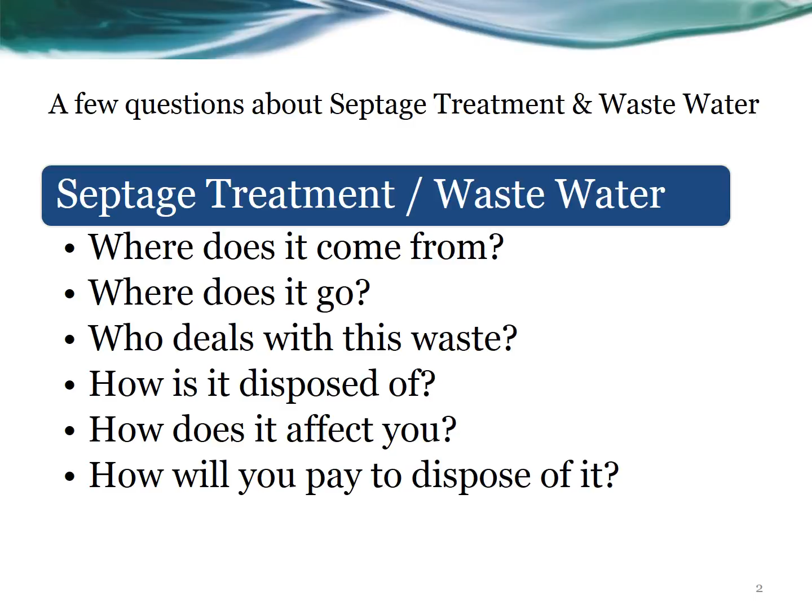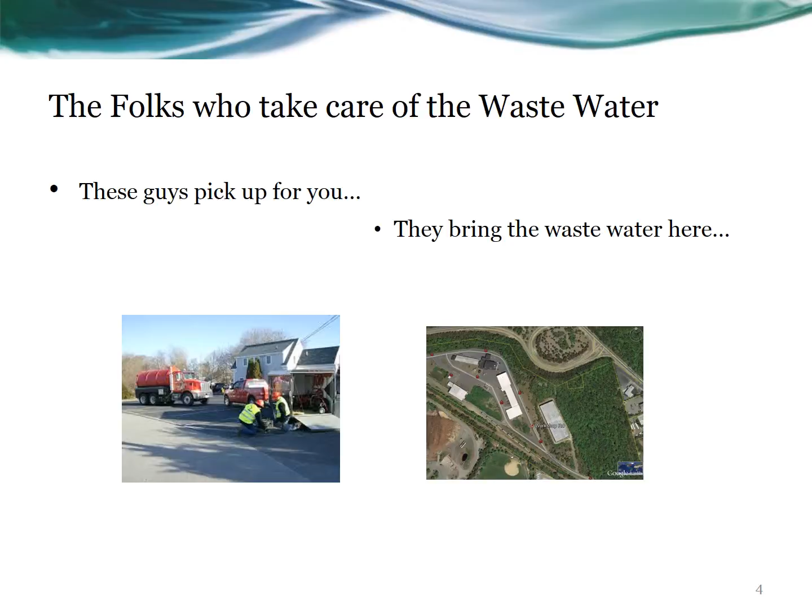The folks who take care of your wastewater live in your neighborhood. They may live next door to you. They drive these cool honey wagons, and they deliver the waste to facilities like the one pictured on the right. The Google Earth photo shows the town of Yarmouth septage treatment facility.

But for now, you see that the wastewater sewage is delivered via truck, then pumped into the building where it flows into a primary settling tank, which is where about 60% of the solids in the waste stream settle into a mixture of sludge and water. This primary treatment removed very few toxic chemicals. Then oxygen is added, and the slides that follow will explain in greater detail.

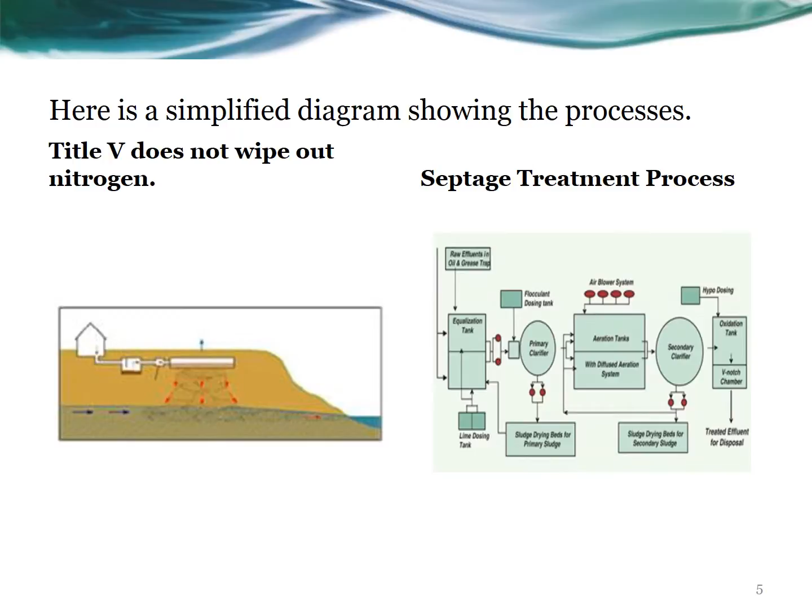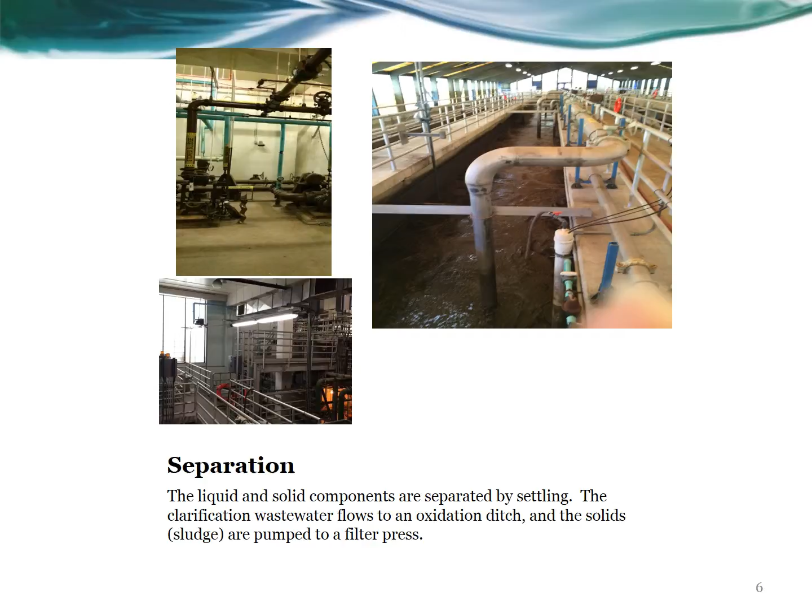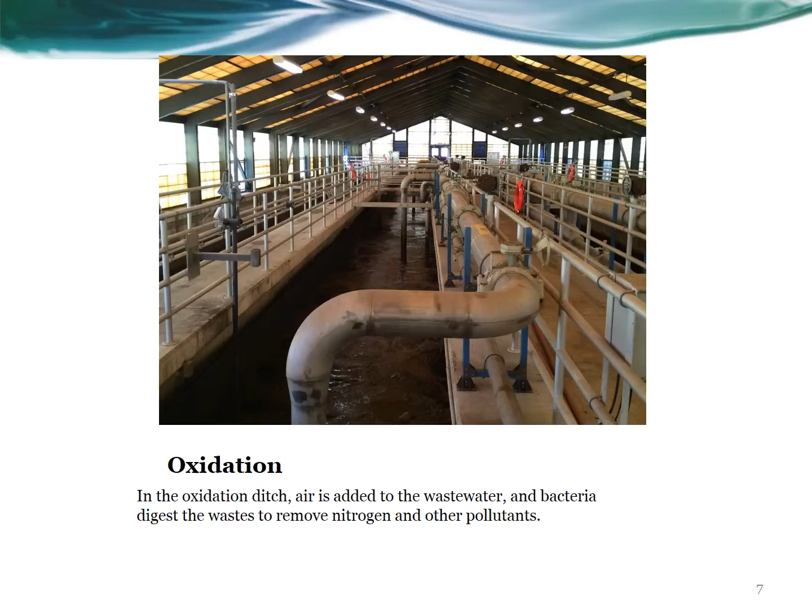Separation takes place in several different areas throughout the facility. The liquid and solid components are separated by settling. The clarified wastewater flows to an oxidation ditch, and the sludge is pumped into a filter press. In the ditch, air is pumped into the wastewater, and bacteria digest the waste to remove nitrogen and other pollutants. The water flows over ultraviolet lights to kill bacteria and viruses.

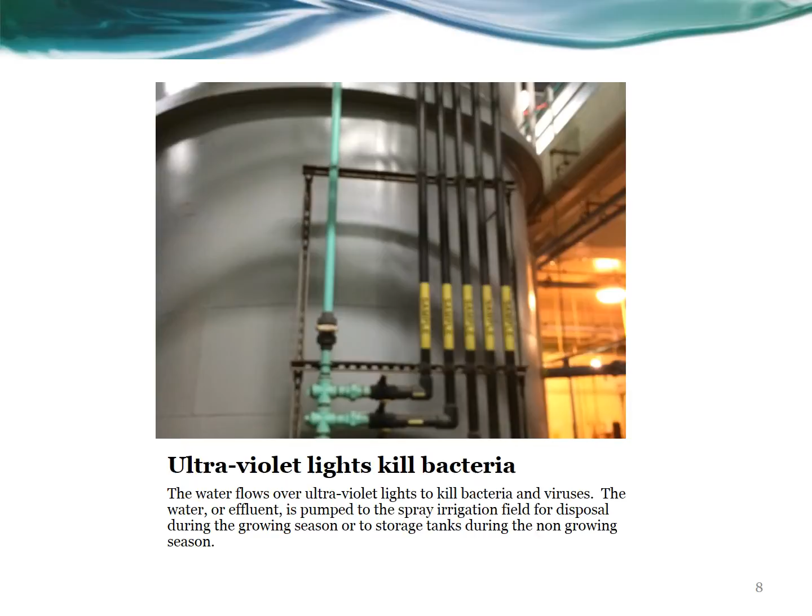The water, or effluent, is pumped to the spray irrigation field for disposal during the growing season or to storage tanks during the non-growing season. As you see in the photograph here, this is effluent being disposed of on a field. The water is spray irrigated onto a field where grass removes the remaining nitrogen. Some water evaporates during spraying. Some water is used by the grass, and some water percolates through the soil and becomes groundwater.

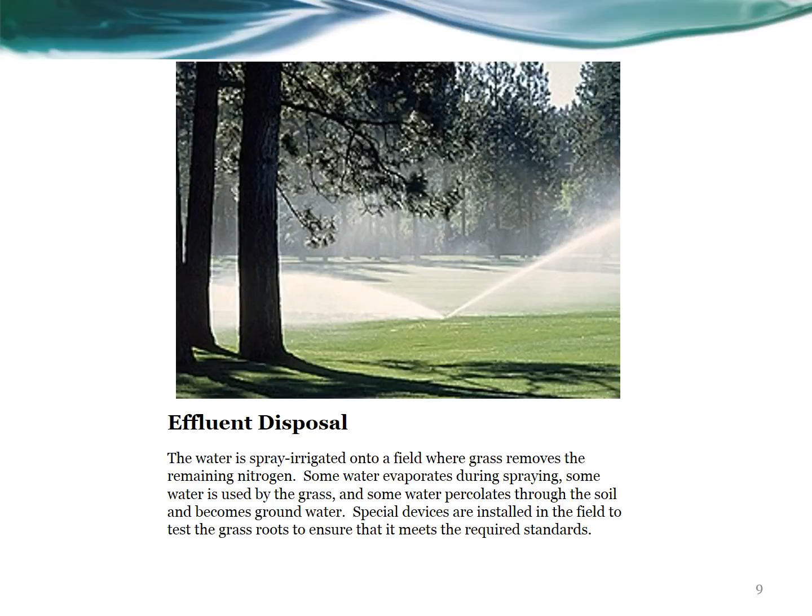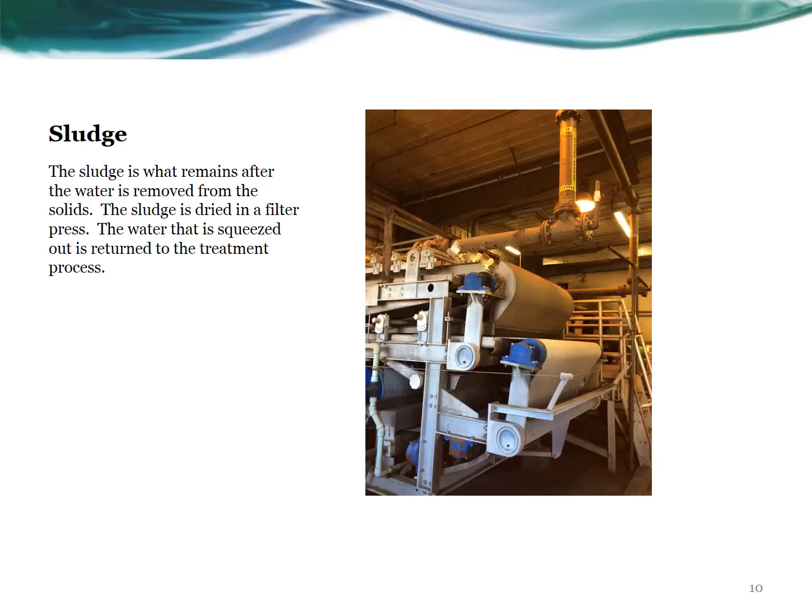Special devices are installed in the field to test the grass roots to ensure that it meets required standards. Sludge is what remains after the water is removed from the solids. The sludge is dried in a filter press. The water is squeezed out to return to the treatment process.

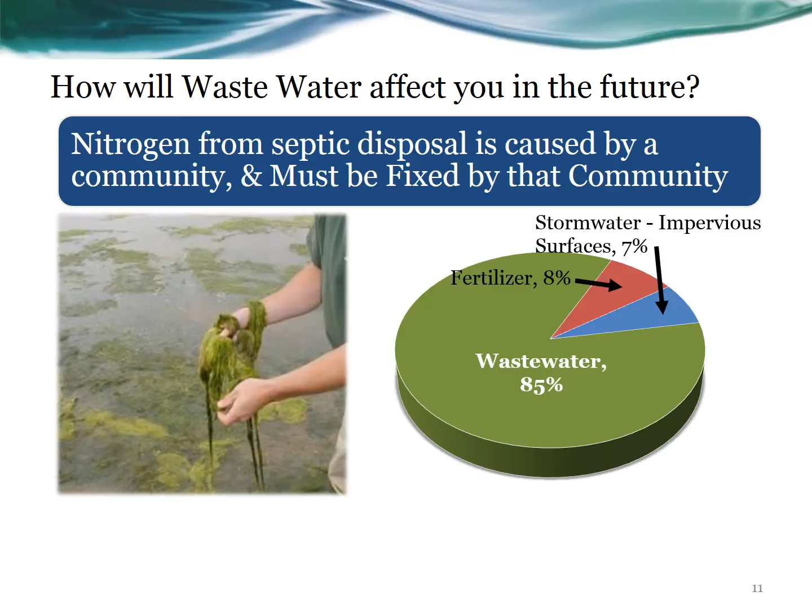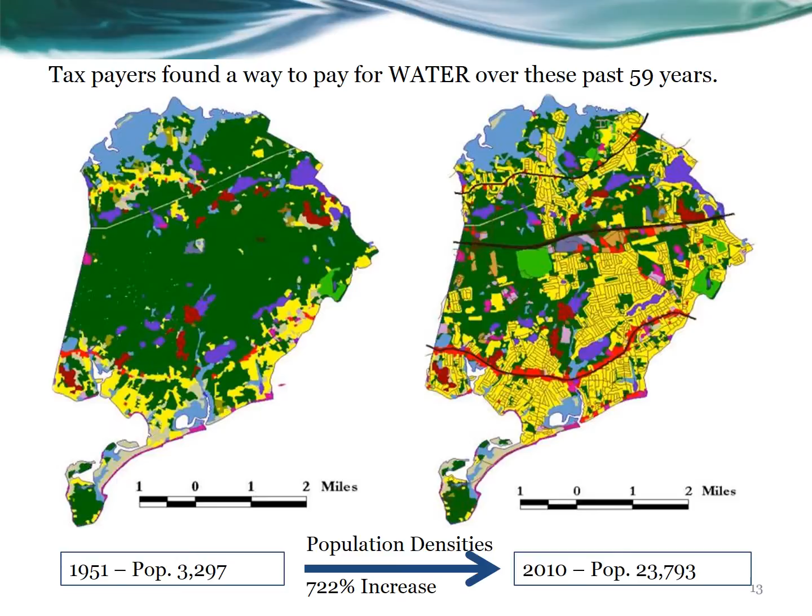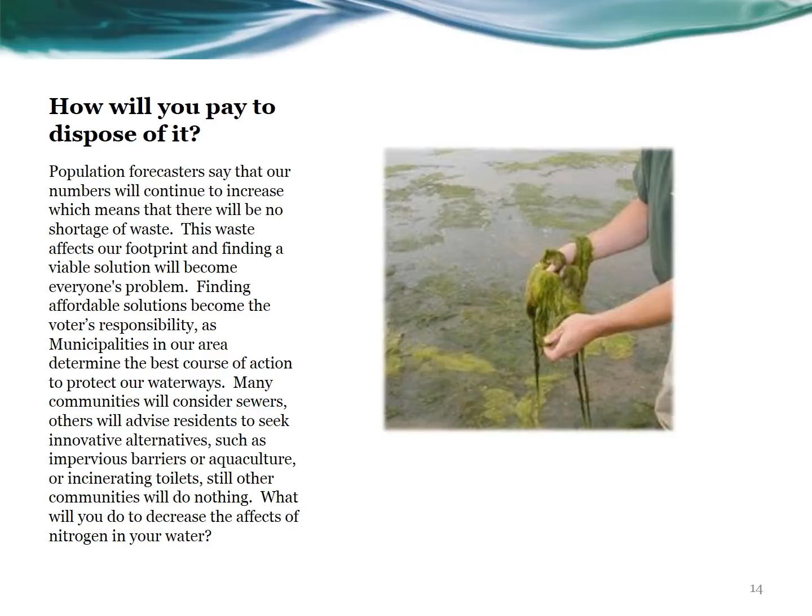Population forecasters say that our numbers will continue to increase, which means that there will be no shortage of waste. This waste affects our footprint, and finding a viable solution will become everyone's problem. Finding affordable solutions will become the voters' responsibility, as municipalities in our area determine the best course of action to protect our waterways. Many communities will consider sewers. Others will consider advising residents to seek innovative alternatives, such as impervious barriers, or aquaculture, or incinerating toilets. Still other communities will do nothing. What will you do to decrease the effects of nitrogen in your water?